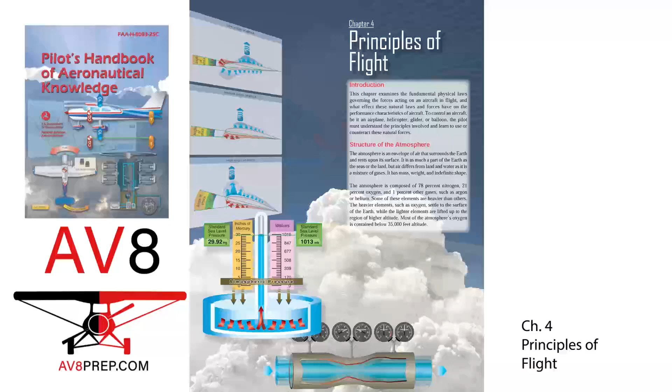Some of these elements are heavier than others. The heavier elements, such as oxygen, settle to the surface of the Earth, while the lighter elements are lifted up to the region of higher altitude. Most of the atmosphere's oxygen is contained below 35,000 feet altitude.

Air is a fluid. When most people hear the word fluid, they usually think of liquid. However, gases like air are also fluids. Fluids take on the shape of their containers. Fluids generally do not resist deformation when even the smallest stress is applied, or they resist it only slightly. We call this slight resistance viscosity. Fluids also have the ability to flow. Just as a liquid flows and fills a container, air will expand to fill the available volume of its container.

Both liquids and gases display these unique fluid properties, even though they differ greatly in density. Understanding the fluid properties of air is essential to understanding the principles of flight.

Viscosity is the property of a fluid that causes it to resist flowing. The way individual molecules of the fluid tend to adhere or stick to each other determines how much a fluid resists flow. High viscosity fluids are thick and resist flow. Low viscosity fluids are thin and flow easily. Air has a low viscosity and flows easily.

Using two liquids as an example, similar amounts of oil and water poured down two identical ramps will flow at different rates due to their different viscosity. The water seems to flow freely while the oil flows much more slowly.

As another example, different types of similar liquids will display different behaviors because of different viscosities. Grease is very viscous. Given time, grease will flow even though the flow rate will be slow. Motor oil is less viscous than grease and flows much more easily, but it is more viscous and flows more slowly than gasoline. All fluids are viscous and have a resistance to flow, whether or not we observe this resistance.

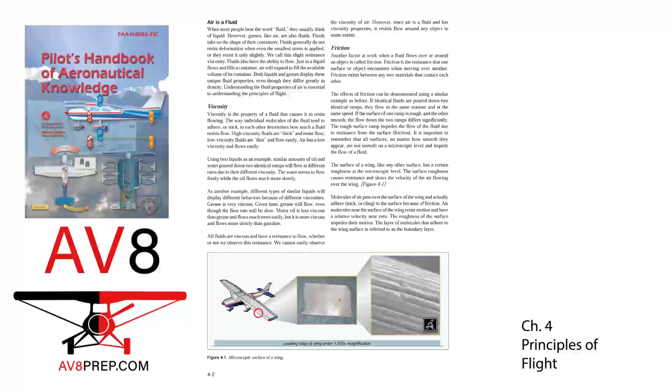Once the boundary layer of the air adheres to the wing by friction, further resistance to the airflow is caused by the viscosity, the tendency of the air to stick to itself. When these two forces act together to resist airflow over a wing, it is called drag.

Pressure is the force applied in a perpendicular direction to the surface of an object. Often pressure is measured in pounds of force exerted per square inch of an object, or psi. An object completely immersed in a fluid will feel pressure uniformly around the entire surface of the object. If the pressure on one surface of the object becomes less than the pressure exerted on the other surfaces, the object will move in the direction of the lower pressure.

Although there are various kinds of pressure, pilots are mainly concerned with atmospheric pressure. It is one of the basic factors in weather changes, helps to lift an aircraft, and actuates some of the important flight instruments. These instruments are the altimeter, airspeed indicator, vertical speed indicator, and manifold pressure gauge.

Air is very light, but it has mass and is affected by the attraction of gravity. Therefore, like any other substance, it has weight, and because of its weight, it has force. Since air is a fluid substance, this force is exerted equally in all directions. Its effect on bodies within the air is called pressure.

Under standard conditions at sea level, the average pressure exerted by the weight of the atmosphere is approximately 14.70 pounds per square inch, psi, of surface, or 1013.2 millibars (MB). The thickness of the atmosphere is limited, therefore the higher the altitude, the less air there is above. For this reason, the weight of the atmosphere at 18,000 feet is one-half what it is at sea level.

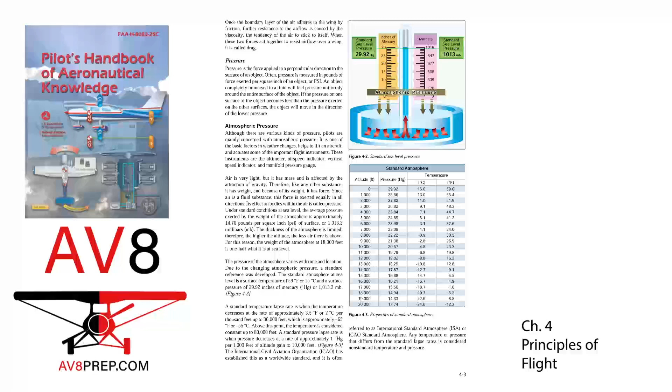Figure 4-3. The International Civil Aviation Organization, ICAO, has established this as a worldwide standard, and it is often referred to as International Standard Atmosphere, ISA, or ICAO Standard Atmosphere. Any temperature or pressure that differs from the standard lapse rates is considered non-standard temperature and pressure. Since aircraft performance is compared and evaluated with respect to the standard atmosphere, all aircraft instruments are calibrated for the standard atmosphere.

In order to properly account for the non-standard atmosphere, certain related terms must be defined. Pressure altitude is the height above a standard datum plane, SDP, which is a theoretical level where the weight of the atmosphere is 29.92 inches Hg, or 1013.2 millibars, as measured by a barometer. An altimeter is essentially a sensitive barometer calibrated to indicate altitude in the standard atmosphere. If the altimeter is set for 29.92 inches Hg SDP, the altitude indicated is the pressure altitude.

As atmospheric pressure changes, the SDP may be below, at, or above sea level. Pressure altitude is important as a basis for determining airplane performance, as well as for assigning flight levels to airplanes operating at or above 18,000 feet.

The pressure altitude can be determined by one of the following methods: 1. Setting the barometric scale of the altimeter to 29.92 and reading the indicated altitude. 2. Applying a correction factor to the indicated altitude according to the reported altimeter setting.

Density altitude: SDP is a theoretical pressure altitude, but aircraft operate in a non-standard atmosphere, and the term density altitude is used for correlating aerodynamic performance in the non-standard atmosphere.

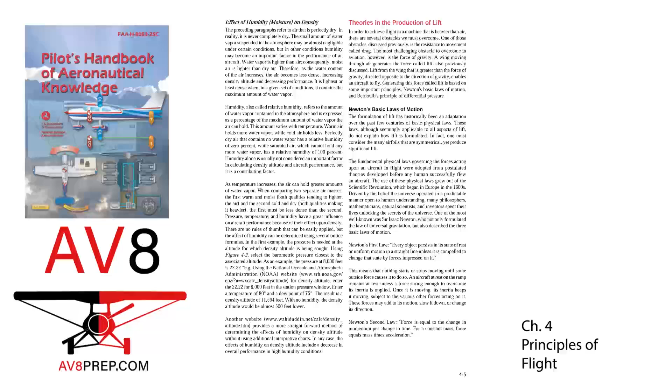Newton's second law: force is equal to the change in momentum per change in time. For a constant mass, force equals mass times acceleration. When a body is acted upon by a constant force, its resulting acceleration is inversely proportional to the mass of the body and directly proportional to the applied force. This takes into account the factors involved in overcoming Newton's first law. It covers both changes in direction and speed, including starting up from rest, positive acceleration, and coming to a stop, negative acceleration or deceleration.

Newton's third law: for every action, there is an equal and opposite reaction. In an airplane, the propeller moves and pushes back the air. Consequently, the air pushes the propeller, and thus the airplane, in the opposite direction, forward. In a jet airplane, the engine pushes a blast of hot gases backward. The force of equal and opposite reaction pushes against the engine and forces the airplane forward.

Bernoulli's principle of differential pressure. A half-century after Newton formulated his laws, Daniel Bernoulli, a Swiss mathematician, explained how the pressure of a moving fluid, liquid or gas, varies with its speed of motion. Bernoulli's principle states that as the velocity of a moving fluid increases, the pressure within the fluid decreases. This principle explains what happens to air passing over the curved top of the airplane wing.

A practical application of Bernoulli's principle is the Venturi tube. The Venturi tube has an air inlet that narrows to a throat, a constricted point, and an outlet section that increases in diameter toward the rear. The diameter of the outlet is the same as that of the inlet. The mass of air entering the tube must exactly equal the mass exiting the tube. At the constriction, the speed must increase to allow the same amount of air to pass in the same amount of time as in all other parts of the tube. When the air speeds up, the pressure also decreases. Past the constriction, the airflow slows and the pressure increases.

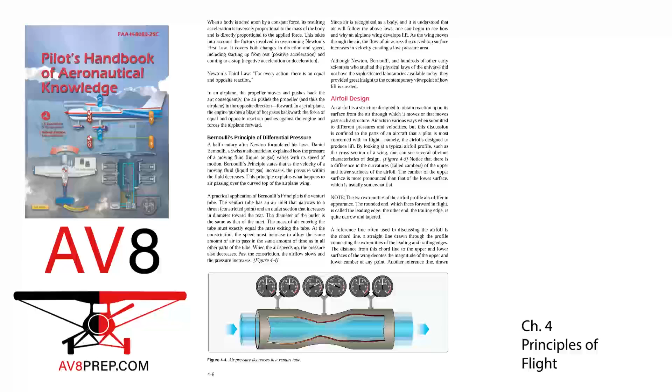The distance from this chord line to the upper and lower surfaces of the wing denotes the magnitude of the upper and lower camber at any point. Another reference line, drawn from the leading edge to the trailing edge, is the mean camber line. This mean line is equidistant at all points from the upper and lower surfaces.

An airfoil is constructed in such a way that its shape takes advantage of the air's response to certain physical laws. This develops two actions from the air mass: a positive pressure lifting action from the air mass below the wing, and a negative pressure lifting action from lowered pressure above the wing.

As the airstream strikes the relatively flat lower surface of a wing or rotor blade when inclined at a small angle to its direction of motion, the air is forced to rebound downward, causing an upward reaction in positive lift. At the same time, the airstream striking the upper curved section of the leading edge is deflected upward. An airfoil is shaped to cause an action on the air and forces air downward, which provides an equal reaction from the air, forcing the airfoil upward.

If a wing is constructed in such form that it causes a lift force greater than the weight of the aircraft, the aircraft will fly. If all the lift required were obtained merely from the deflection of air by the lower surface of the wing, an aircraft would only need a flat wing like a kite. However, the balance of the lift needed to support the aircraft comes from the flow of air above the wing. Herein lies the key to flight.

It is neither accurate nor useful to assign specific values to the percentage of lift generated by the upper surface of an airfoil versus that generated by the lower surface. These are not constant values. They vary not only with flight conditions but also with different wing designs. Different airfoils have different flight characteristics.

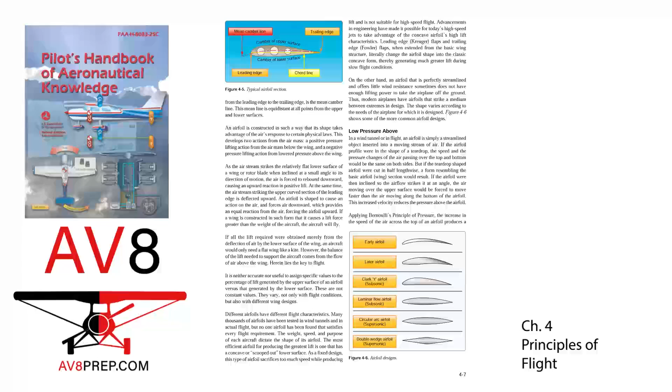If the airfoil were then inclined so the airflow strikes it at an angle, the air moving over the upper surface would be forced to move faster than the air moving along the bottom of the airfoil. This increased velocity reduces the pressure above the airfoil. Applying Bernoulli's principle of pressure, the increase in the speed of the air across the top of an airfoil produces a drop in pressure. This lowered pressure is a component of total lift.

The pressure difference between the upper and lower surface of a wing alone does not account for the total lift force produced. The downward-backward flow from the top surface of an airfoil creates a downwash. This downwash meets the flow from the bottom of the airfoil at the trailing edge. Applying Newton's third law, the reaction of this downward-backward flow results in an upward-forward force on the airfoil.

High pressure below: a certain amount of lift is generated by pressure conditions underneath the airfoil. Because of the manner in which air flows underneath the airfoil, a positive pressure results, particularly at higher angles of attack.

However, there is another aspect to this airflow that must be considered. At a point close to the leading edge, the airflow is virtually stopped at the stagnation point, and then gradually increases speed. At some point near the trailing edge, it again reaches a velocity equal to that on the upper surface. In conformance with Bernoulli's principle, where the airflow was slowed beneath the airfoil, a positive upward pressure was created—as the fluid speed decreases, the pressure must increase. Since the pressure differential between the upper and lower surface of the airfoil increases, total lift increases. Both Bernoulli's principle and Newton's laws are in operation whenever lift is being generated by an airfoil.

Pressure distribution. From experiments conducted on wind tunnel models and on full-size airplanes, it has been determined that as air flows along the surface of a wing at different angles of attack, AOA, there are regions along the surface where the pressure is negative, or less than atmospheric, and regions where the pressure is positive, or greater than atmospheric. This negative pressure on the upper surface creates a relatively larger force on the wing than is caused by the positive pressure resulting from the air striking the lower wing surface.

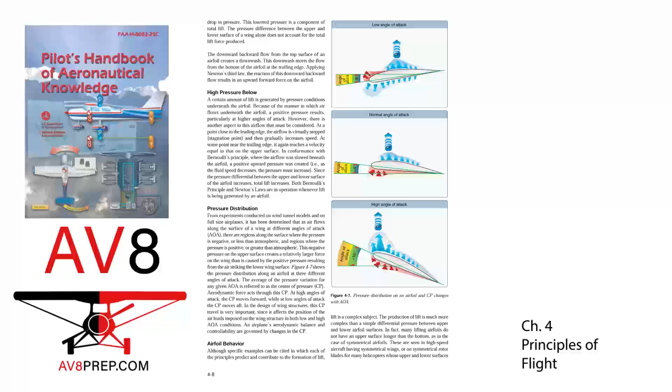Airfoil behavior. Although specific examples can be cited in which each of the principles predict and contribute to the formation of lift, lift is a complex subject. The production of lift is much more complex than a simple differential pressure between upper and lower airfoil surfaces. In fact, many lifting airfoils do not have an upper surface longer than the bottom, as in the case of symmetrical airfoils. These are seen in high-speed aircraft having symmetrical wings or on symmetrical rotor blades for many helicopters whose upper and lower surfaces are identical. In both examples, the only difference is the relationship of the airfoil with the oncoming airstream, angle. A paper airplane, which is simply a flat plate, has a bottom and top exactly the same shape and length. Yet these airfoils do produce lift, and flow turning is partly or fully responsible for creating lift.

As an airfoil moves through air, the airfoil is inclined against the airflow, producing a different flow caused by the airfoil's relationship to the oncoming air. Think of a hand being placed outside the car window at high speed. If the hand is inclined in one direction or another, the hand will move upward or downward. This is caused by deflection, which in turn causes the air to turn about the object within the airstream. As a result of this change, the velocity about the object changes in both magnitude and direction, resulting in a measurable velocity, force, and direction—a third dimension.

To this point, the discussion has centered on the flow across the upper and lower surfaces of an airfoil. While most of the lift is produced by these two dimensions, a third dimension, the tip of the airfoil, also has an aerodynamic effect. The high-pressure area on the bottom of an airfoil pushes around the tip to the low-pressure area on the top, figure 4-8. This action creates a rotating flow called a tip vortex. The vortex flows behind the airfoil, creating a downwash that extends back to the trailing edge of the airfoil. This downwash results in an overall reduction in lift for the affected portion of the airfoil.

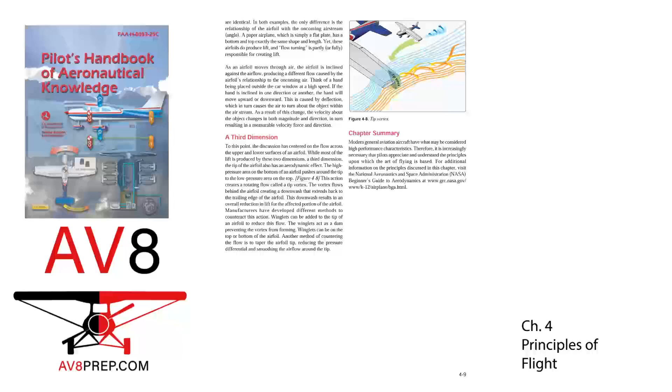Chapter Summary. Modern general aviation aircraft have what may be considered high-performance characteristics. Therefore, it is increasingly necessary that pilots appreciate and understand the principles upon which the art of flying is based. For additional information on the principles discussed in this chapter, visit the National Aeronautics and Space Administration, NASA, Beginner's Guide to Aerodynamics.